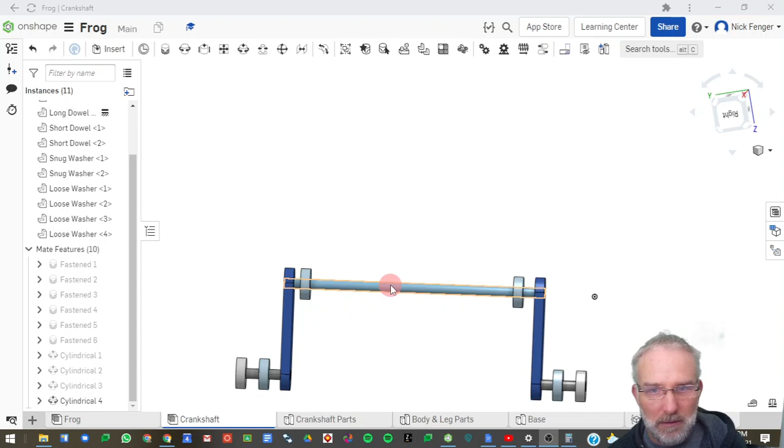Made one small change based on some measurements I made, so let's talk about those. We want to figure out how long this crankshaft needs to be, and that's going to be a small calculation that we're going to do.

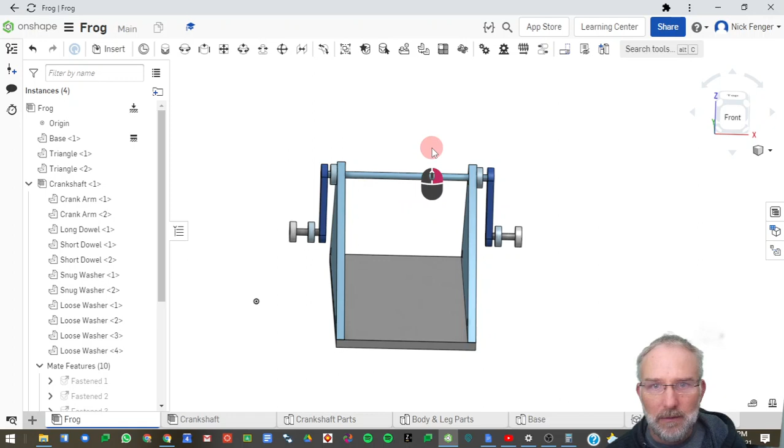So I'm going to switch over to the frog here and kind of eyeball things for a second. I don't have that in there yet, but what I do have is the right size crankshaft. You probably do not yet. So what you want here is about a millimeter gap. You can play with these dimensions.

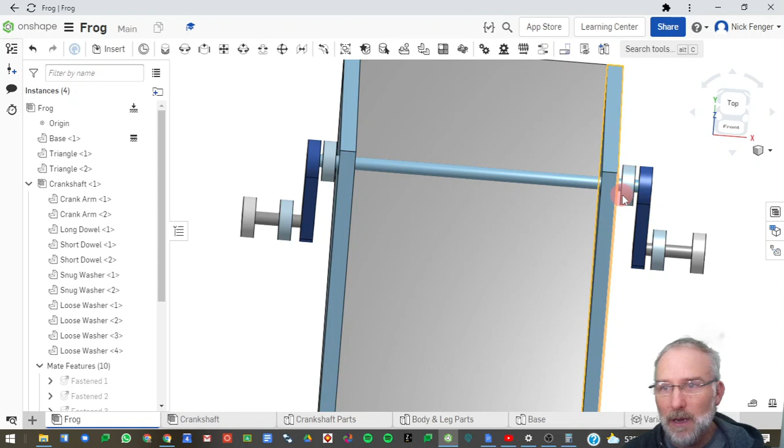You want your spacer washer a millimeter gap and then another millimeter gap. That should give you some clearance, so if things don't laser cut right, or if there's variations in the cardboard thickness, giving yourself a millimeter between the spacer, the crank arm, and the body triangle should accommodate for those variations in materials. Worst case, you just have to cut a new dowel if it doesn't fit. So I would definitely test fit everything.

So what I did do is some calculations here on our full crankshaft. Those look like this. I pulled up a Google sheet and listed all the parts that would be on the main drive crankshaft. You've got your crank arm on the end, then a gap of 1 millimeter. Crank arms are wood, so they're about 3.18. These are all approximates, and that's good.

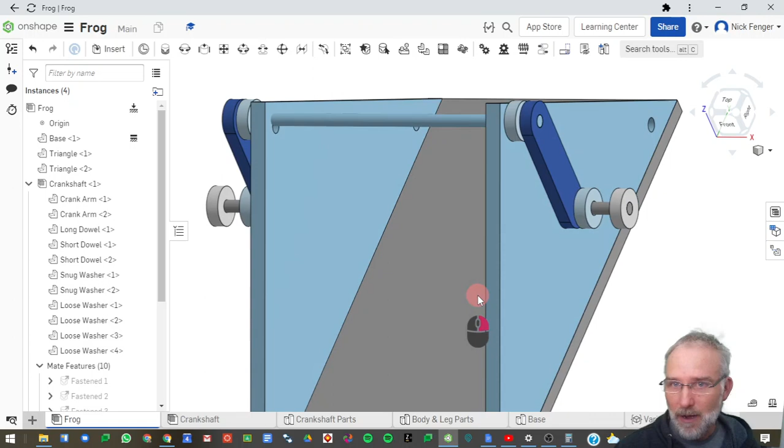If you measure wood and it's slightly different, you can update your drawing and figure out the length if you'd like. Then you have the spacer, another gap, and then the width of your body, which is just 70 mil. Notice the triangles are sitting on top of the body—make sure when you assemble, you do that. You've got 7 centimeters, 70 millimeters, and then the other side.

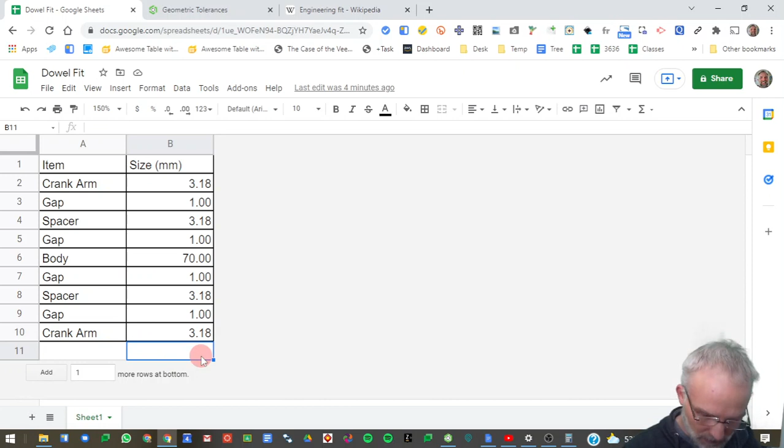You've got another gap, the spacer, another gap, and the crank arm. So we can add all these things up. If we go equal sign, that's how you start a formula, and the sum command will guess it for us. There we go—the length of my long dowel should be 86.72 millimeters to have basically 4 millimeters of play. They call this play.

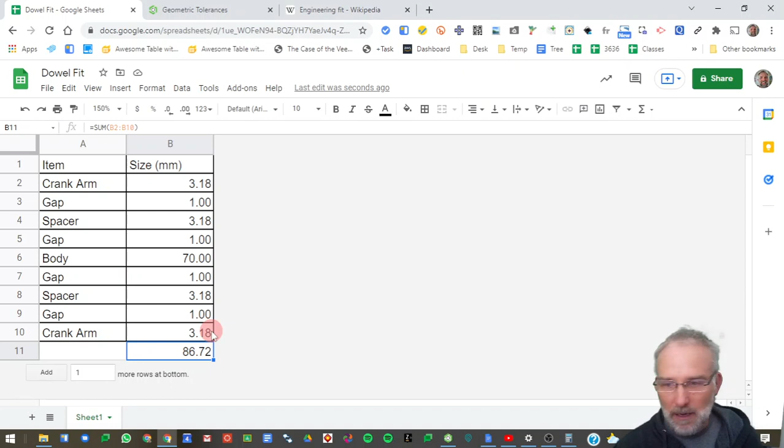That's the space you usually have between bearings and holes. So let's go to our dowel, which is in crankshaft parts, and I believe I've already set that, but if you didn't, your long dowel extrude should be 86.72 millimeters. If it's not, go ahead and make it that.

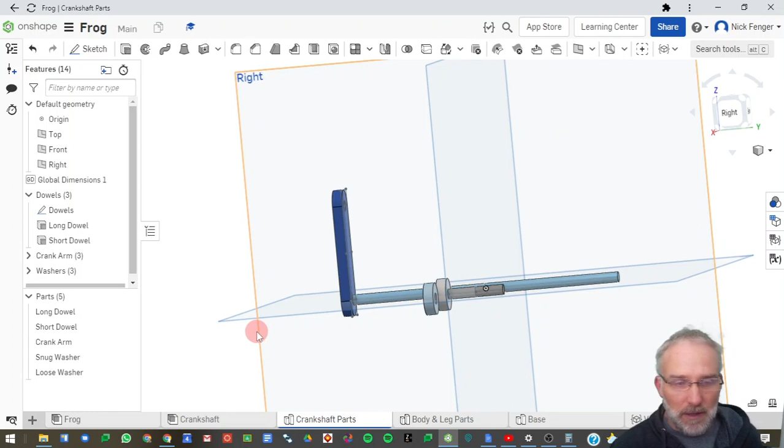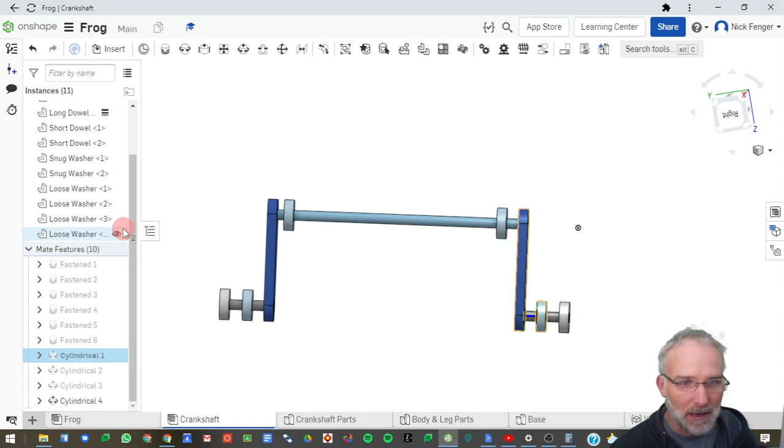One thing I did do is modify the crankshaft cylindrical mate slightly because I want to have 4 millimeters of play in this. So I'm going to give each one of these cylindrical mates a minimum Z of negative 4 millimeters. They all should be updated to negative 4 millimeters. If you haven't done that, go ahead and do it—just right click, edit, and make sure they're all at negative 4 millimeters.

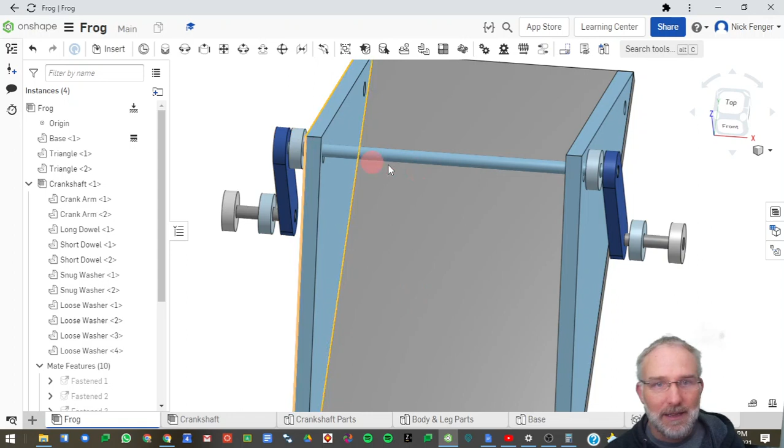Now, we use a cylindrical mate to attach this washer to the shaft, so we're going to reuse that cylindrical mate to attach the crankshaft. So far we've got our sub-assembly with the crankshaft here; if we minimize that, we see the crankshaft. That's what's known as a sub-assembly, and it has its mates, but we only have these 2 fastened mates.

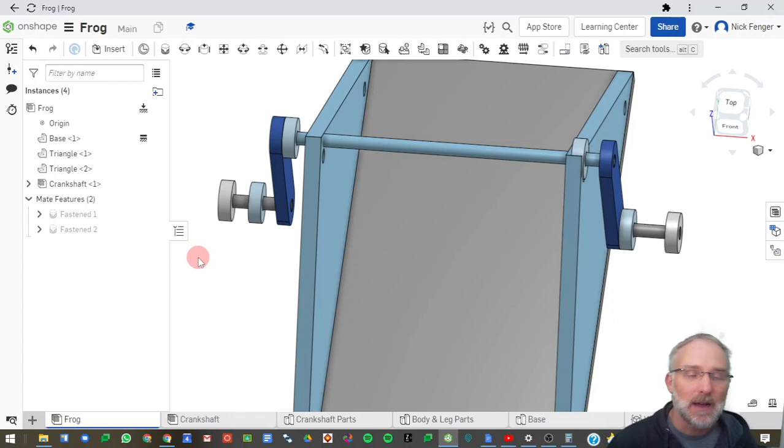So we're going to add some cylindrical mates. Now, we want to use the limits of the mates to prevent this from moving back and forth. Notice our washers are moving on the shaft as we move it—the washers are sliding, kind of like there's inertia or something causing them to move.

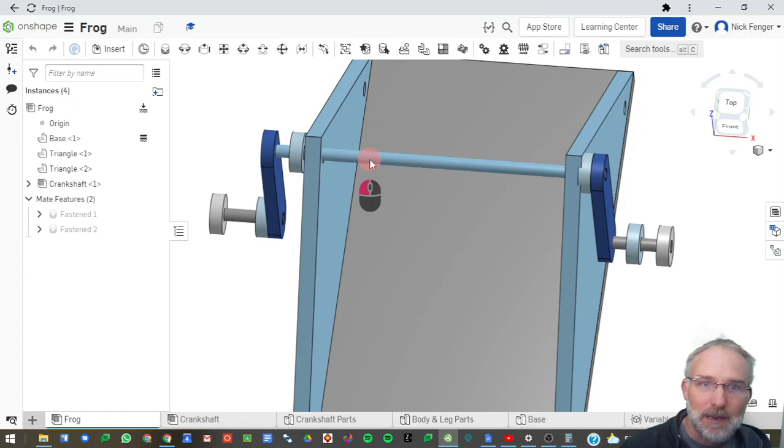Each one of them has 4 millimeters of movement, so you can see how that will work. They're kind of sticking a little bit there when we do this. So we want to make sure that this washer cannot go through this leg. So we want to use a mate that goes from that washer to the leg triangle—let's use a cylindrical mate there because that's the kind we want.

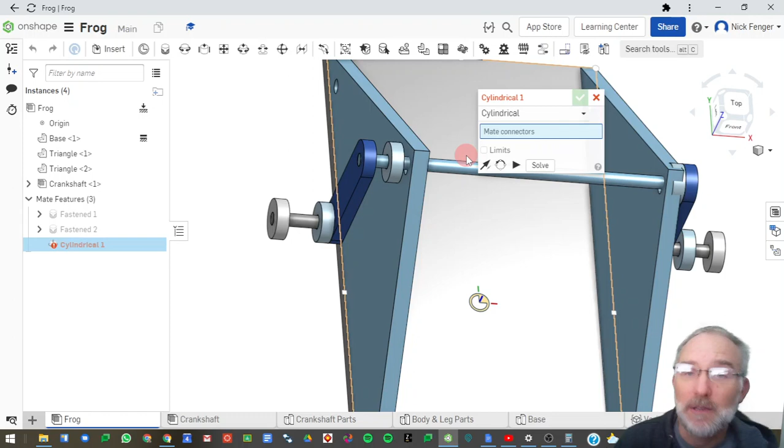It might be a little difficult to do this. You'll need one for each side, so you might have to hide the body to get these, but we want to get the mate right on the face of this and the hole here. So right there—now we want to add some mate of triangle.

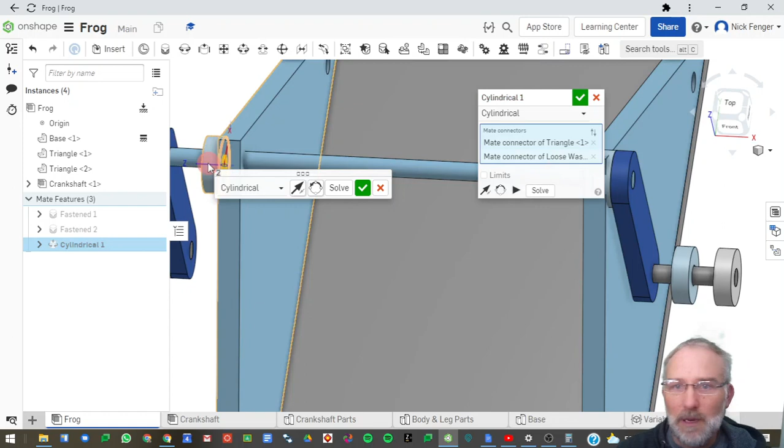I missed the mate on mine—there we go, loose washer. It's a cylindrical mate, and notice it's already starting to move everything into place. We see some of our dimensions there.

So let's add our limits. We want this to not go through the leg, so we want to move it over this way. We notice it's negative 2.72, negative 4. We want this also to be negative 4, so the maximum is going to be 0, and the minimum will be negative 4, just like before. And if we solve that, we should see that it's only moving between the two.

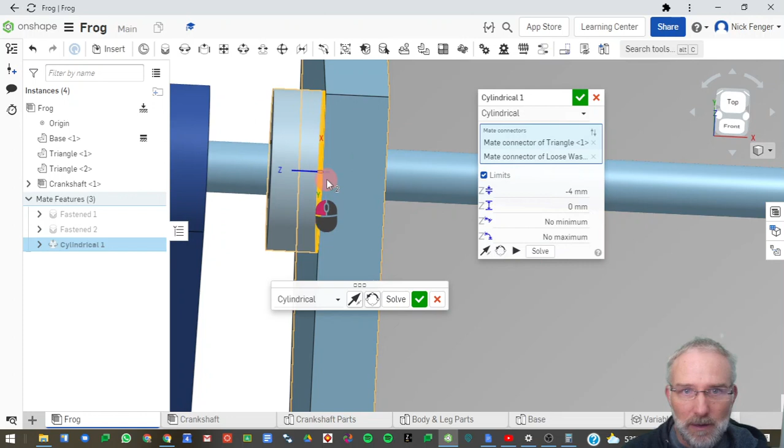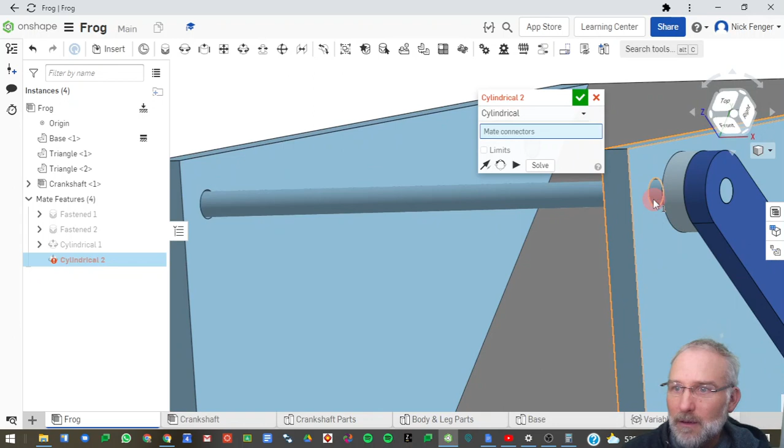Okay, let's go ahead and solve that, or check that, and we're going to add another one—we need to add the one to the other washer. Now you might have to move things around to get this visible. There we go—we're going to pick the triangle and then pick that circle there.

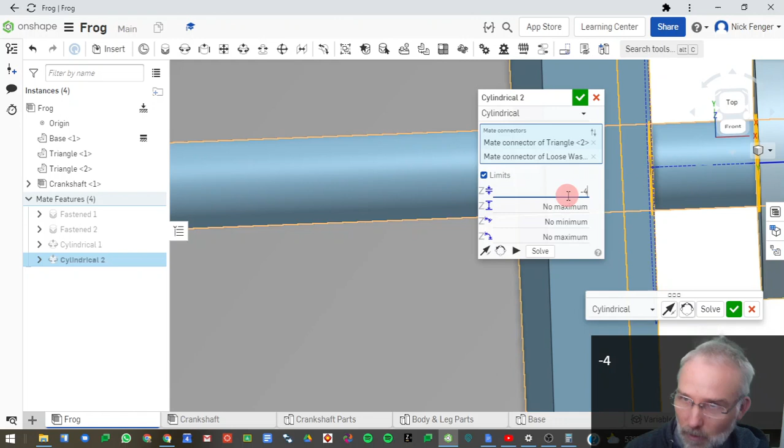Same thing, limits. Again, we can look to see our dimensions of that limit, and it's a little hard to see on this one, but it's going to be the same: negative 4 and 0.

And we'll check this, and once we have that, we should have a working sliding crankshaft, and these washers should move just like they would in the real world. So there we are—everything should move. I slide it left, right. So that's going to give you a nice way.

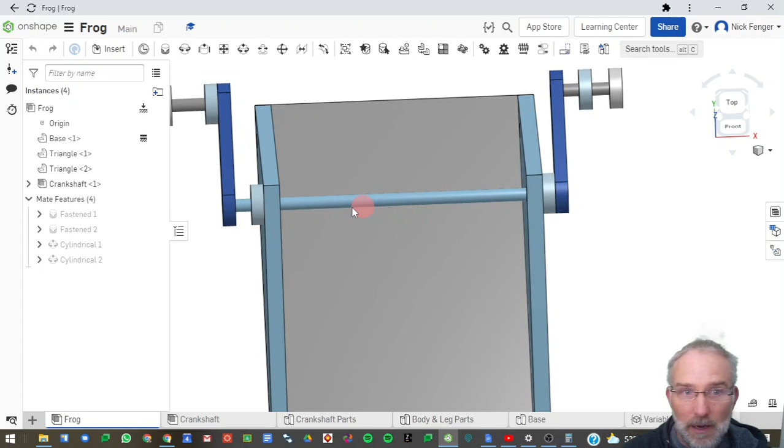Now, if you wanted to change your tolerances, unfortunately there are no variables in assemblies—it's kind of a bummer. So you have to go and change them in each of the cylindrical mates. You only have 2 here, but you'll have more when you add the rest of the crank arms.

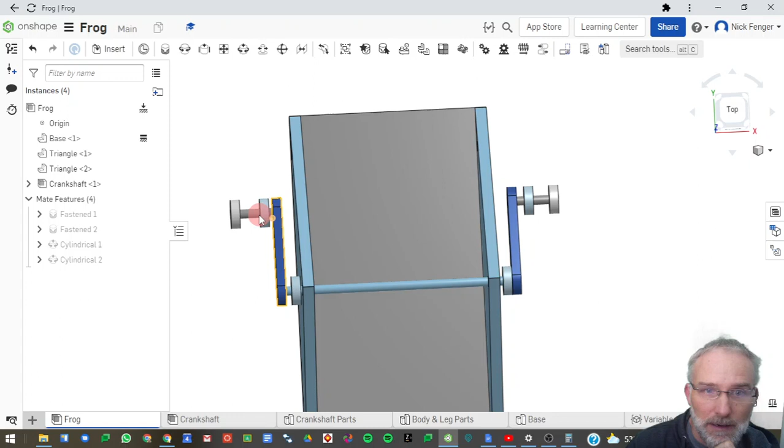So the next step will be to add your crank arm again and duplicate those cylindrical mates, and you should be on your way.